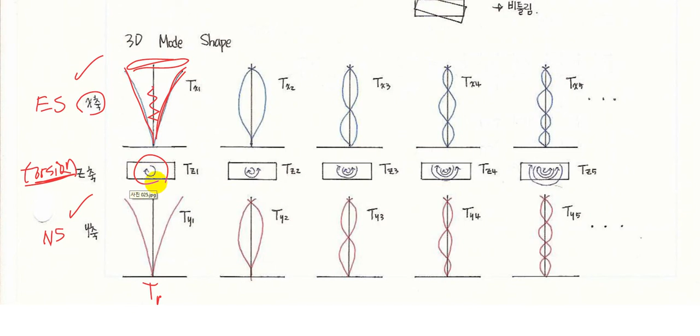So at each mode, and we saw this is the first mode in previous minutes, where your building mode does not cross the vertical line, right? This is the beautiful first mode we saw, one from east to west direction, one from north-south direction, one for torsion, right? And this is one set, or first mode.

And what is the first mode of torsion? Torsion is twisting in one direction only, like this. Okay. This is the first mode, as we call it, and don't forget it. Right? And T1 is the mode that generates all these mode shapes and torsions, right?

Let's go to the second mode and how the second mode is generated by the second natural period. We don't call this fundamental anymore. We call the first the fundamental or longest mode, right? But we just say second longest, third longest. That's okay. But we usually say second mode, third mode, fourth mode, and fifth mode. Okay? T2, T3, T4, T5.

And in T2, how many crossovers are we observing? We observe one crossover, right? In both axes, x-axis and y-axis, east to west or south-north direction. It doesn't matter. And what about torsion? Torsion now also changes twisting direction once, like you cross over the vertical line once for the horizontal mode.

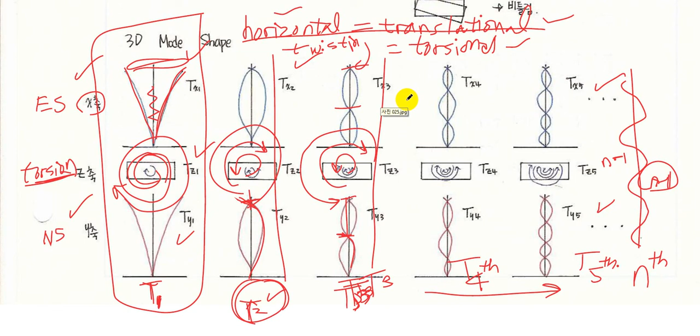So you go to the nth mode. How many times do we cross over the vertical axis? n minus 1 times, right? And how many times would the torsion direction change? n minus 1 times again, right? And both in x and y axis. This is more complicated, but basically the same reasoning applies to understand all modes in all directions. Okay.